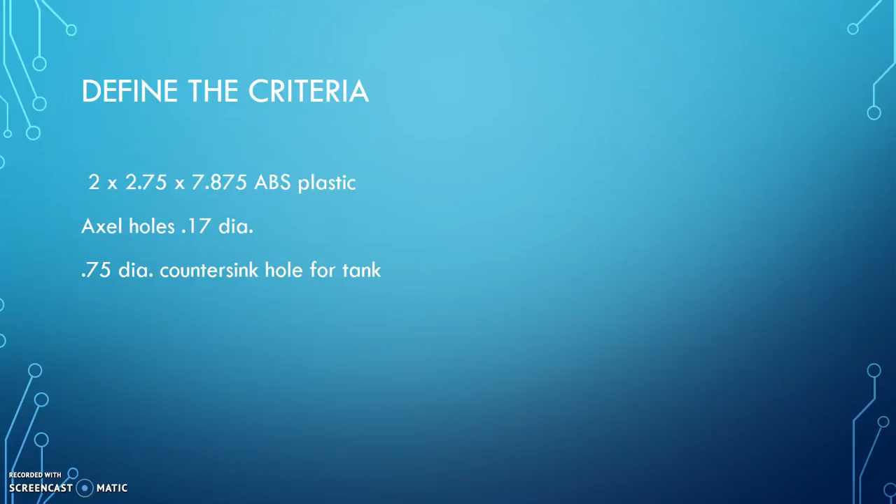The criteria given was to be within the dimensions of a 2 by 2.75 by 7.875 ABS plastic. Axle holes needed to be 0.17 inch diameters, and a 0.75 inch diameter countersink hole for the tank needed to be in the vehicle as well. The body was the only part that was custom. Everything else was provided and given to us: 2 front small wheels, 2 big back wheels, 1 CO2 tank, 2 axles, and 2 eye hooks.

Mainly the parts are given to us to measure and make sure that they would be snug and aligned within our final design. As soon as the project was listed, the first thing that came to my mind was Formula 1, so I decided to take inspiration from that research and what I could find. I knew I needed to make a car that could increase laminar flow and decrease turbulent flow.

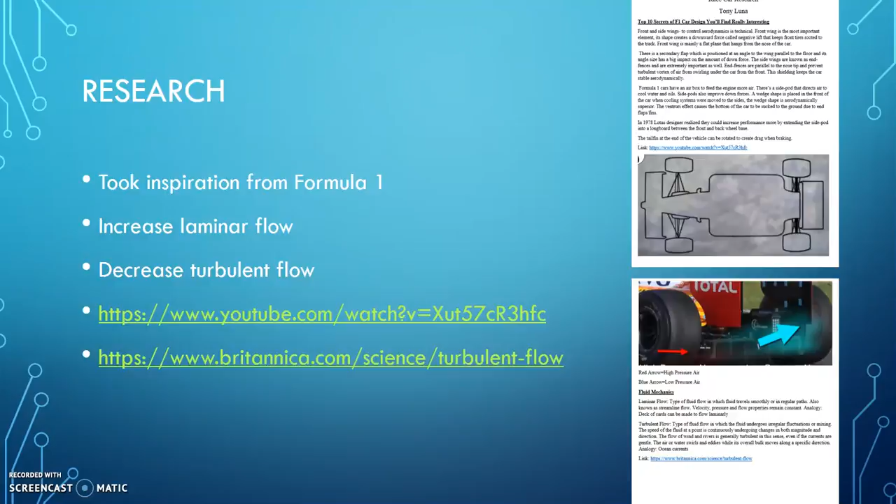In 1978, Lotus designers realized that they could increase performance more by extending the side pod into a long board between the front and the back wheel. I specifically looked into Formula 1 cars to find the best design ideas, and this is the most modern body style of cars used today, and it ended up being the best.

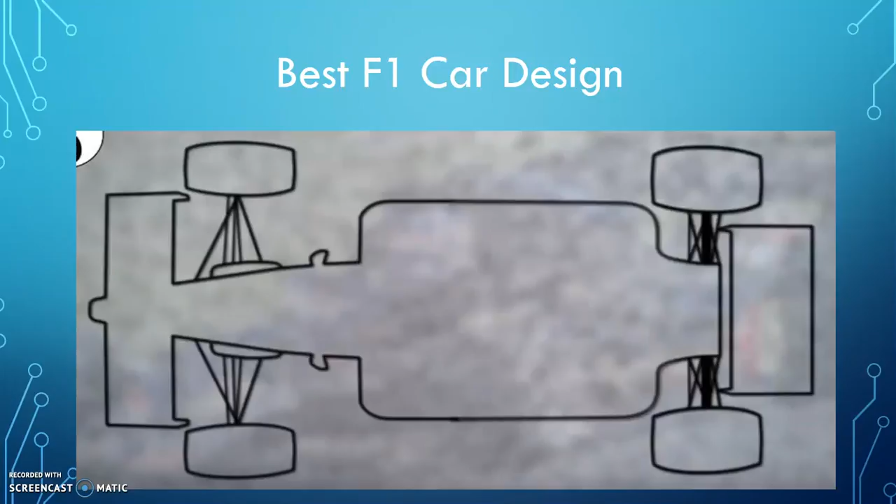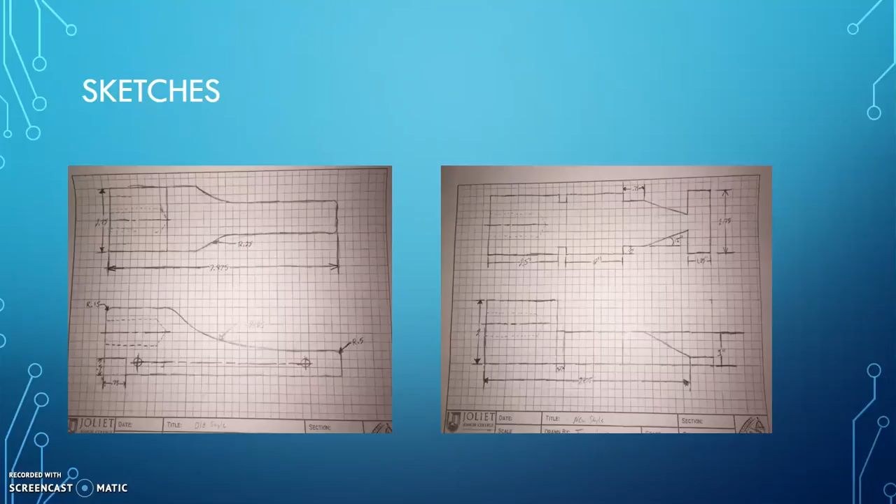The one on the left is my sketch of an old style body. The one on the right is my sketch of a newer style body. Eventually I went with the newer style because it was significantly superior, from the research that I found, to be faster. At first, this was my first choice of the body style that I went with. It was blocky and the tank was round.

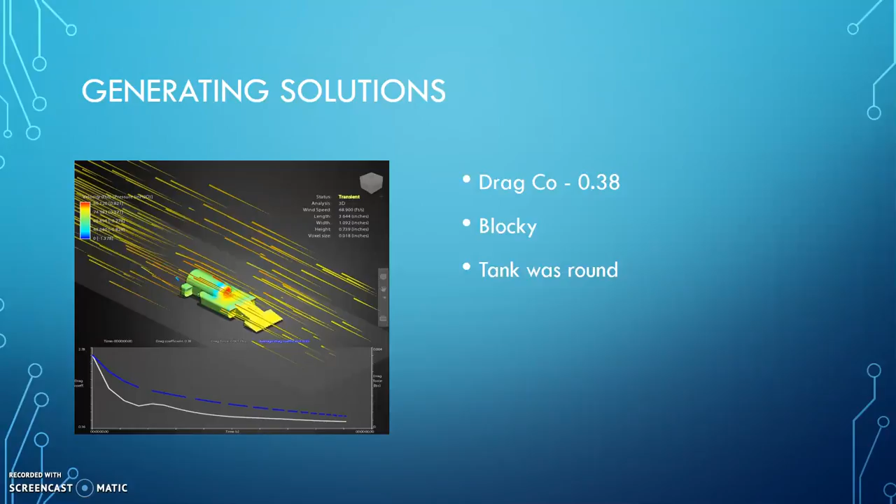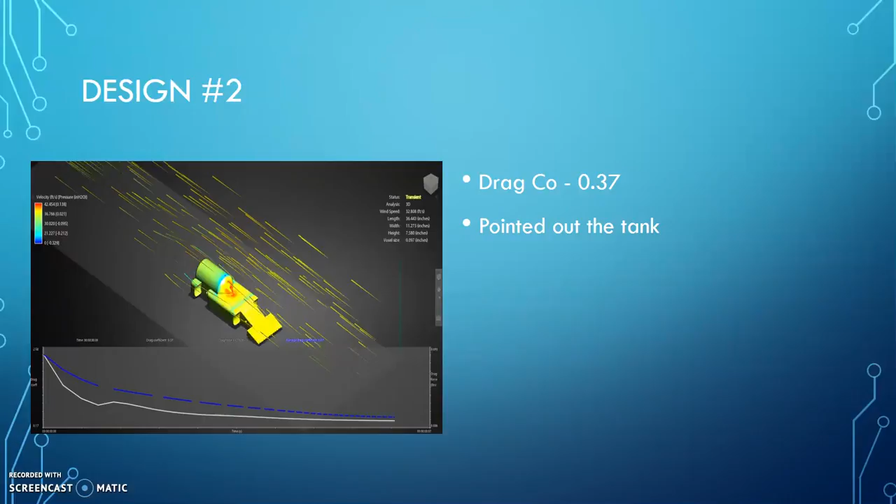But once I was introduced to the wind tunnel flow design and tested it out, I soon realized that I had some issues with my design. The coefficient was too high for me, and I saw some bright red in front of the round tank, and I knew I had to make some changes. In design number 2, I thought it would be a good idea to make the tank come to a point to reduce some wind, but there was still too much red in the front of it.

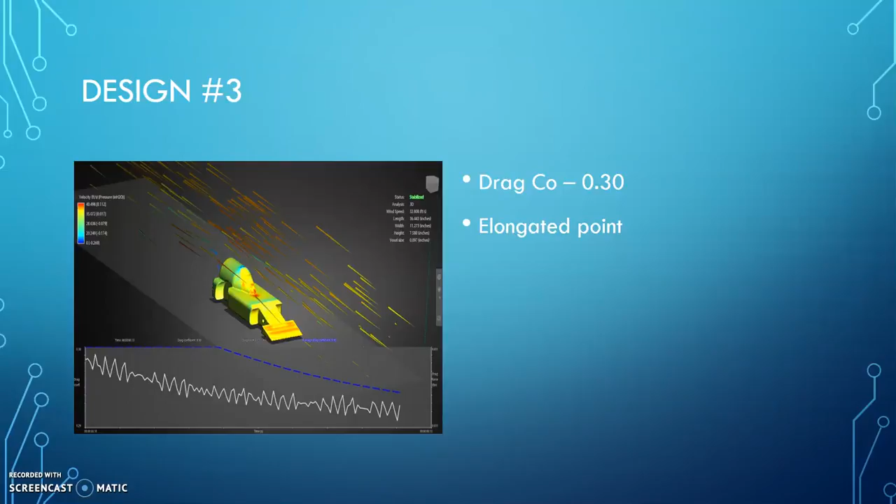So I went with design number 3, in which I rounded out the point, and it did create less red in the simulation. Then I noticed maybe I could extend the tank by making it longer, and I would therefore reduce drag. In doing so, I came up with design number 4, making the tank longer, sonic boom inspiration. If you've ever seen the Doppler effect, that's what I went with, and it really did not create much of a change in the drag coefficient. I needed some more blue and green because that showed signs of a laminar flow.

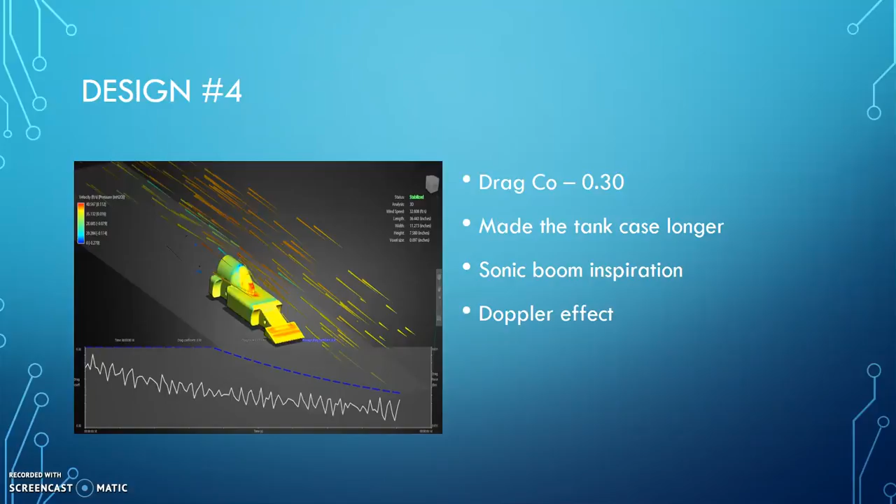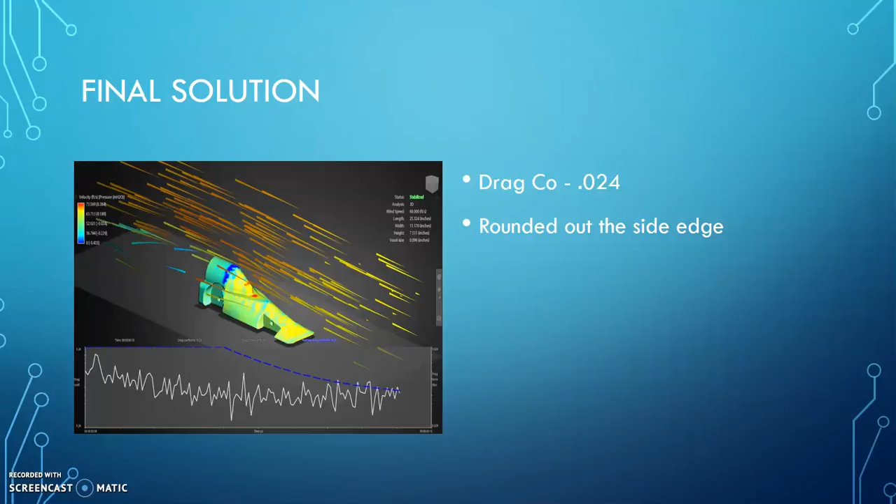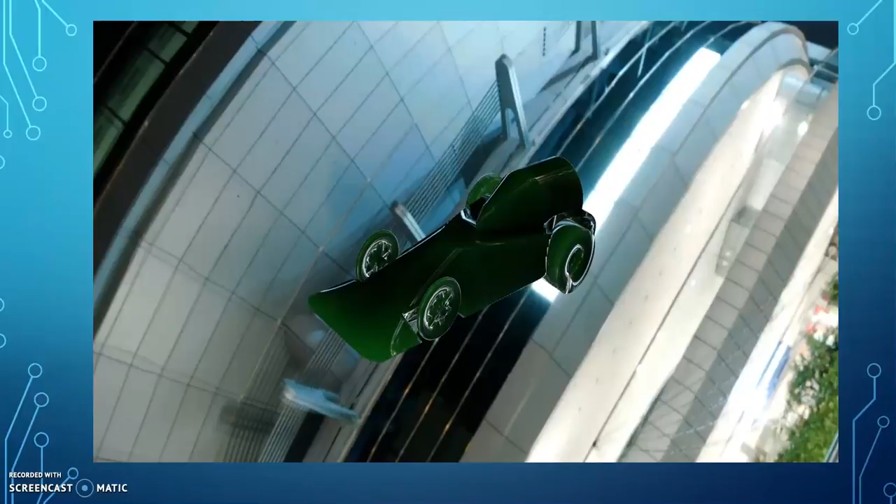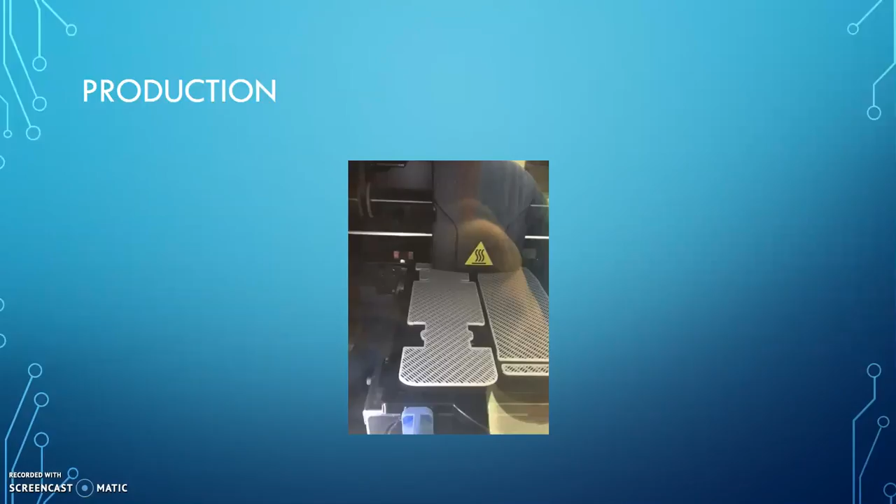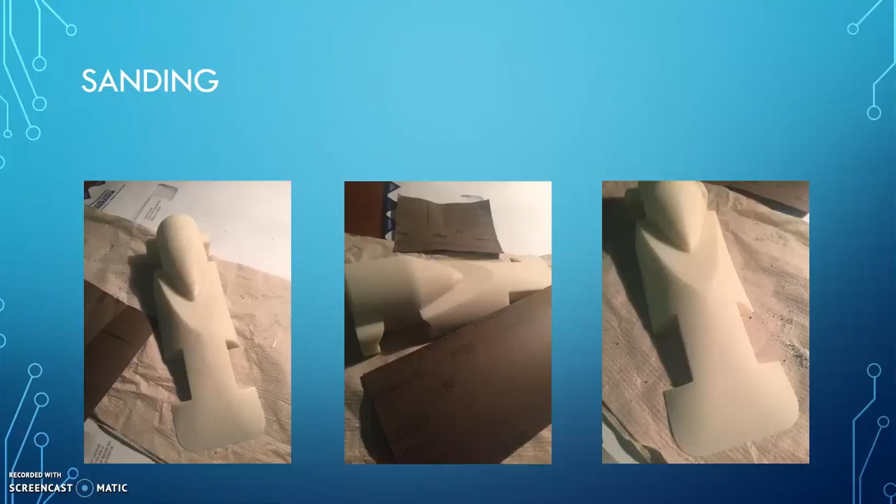Production: once it started, this is the first layer of the structural support for the 3D printing. Once my car was fully printed, I decided to sand it down with 80 and 180 grit paper to try to make the surface of it smoother. And when I found a texture that I was comfortable with, I decided to prime it and paint it. I added 3 coats of primer, 5 coats of paint, and 3 coats of clear coat.

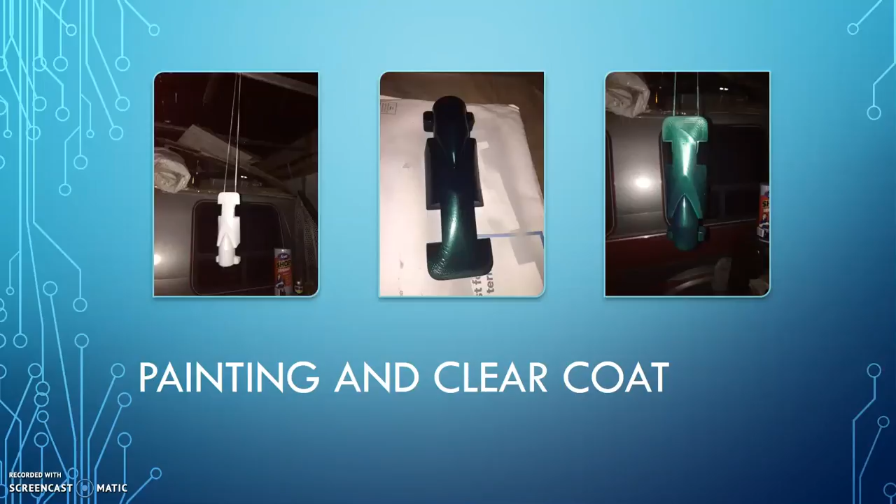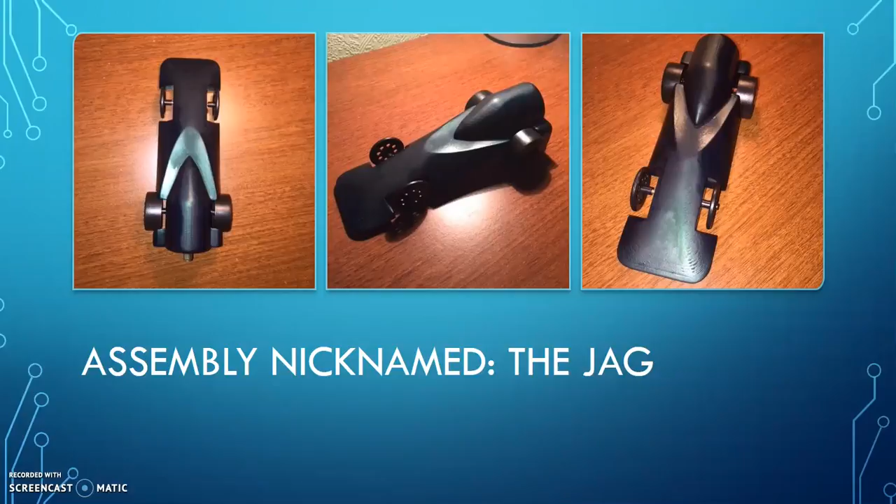Once the paint was dry, I assembled it, added the axles, put in the wheels, and made sure that the front of the bumper didn't grind down on the floor. Made sure it moved smooth and light, and I was quite pleased with it. The total weight of the vehicle ended up being 255.4 grams, a little light against the other competitors, my classmates.

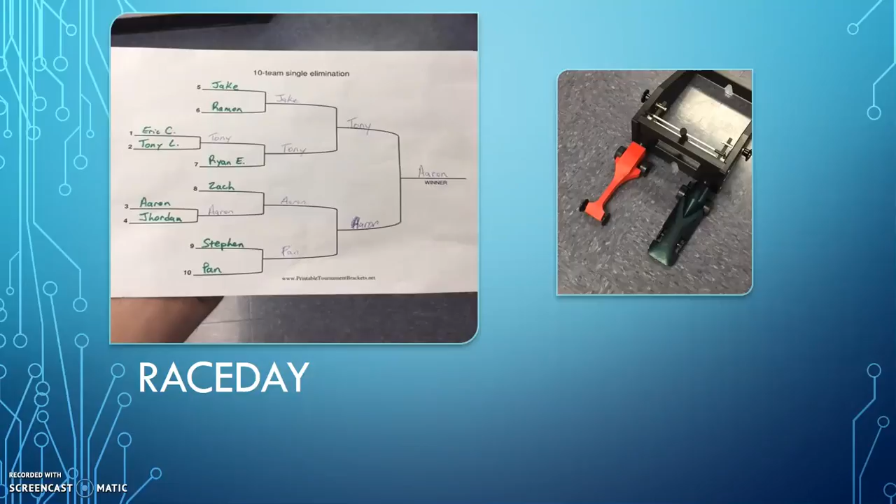My own design actually ended up being better than I thought. I tried to make sure that my vehicle was the fastest, most aerodynamic car, and it got me to the top 2 position. Versus Eric, Ryan, and Jake, my vehicle did win, slightly faster by 1 or 2 seconds, 3 seconds with Eric. We'll go to the videos in a little bit, and the photo on the right is the championship round between me and Aaron Schroba.

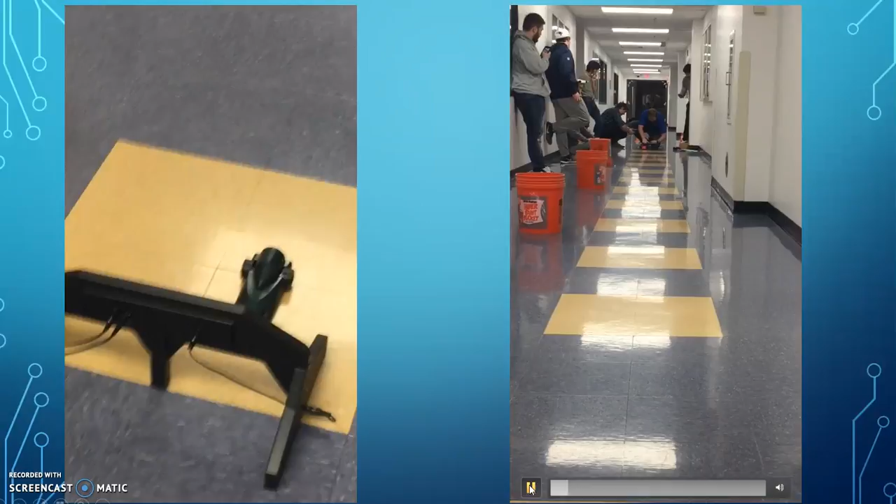Here are the videos. The video on the left would be me versus Ryan Elliott. Notice my car did swerve a lot. I figured out that was due to the weight distribution. There's much more weight in the back than there was in the front. The next video was between me and Jake Koza. Again, it did swerve, but it did win the race. Notice that my car would be 1 or 2 seconds in front of Jake's and Ryan's.

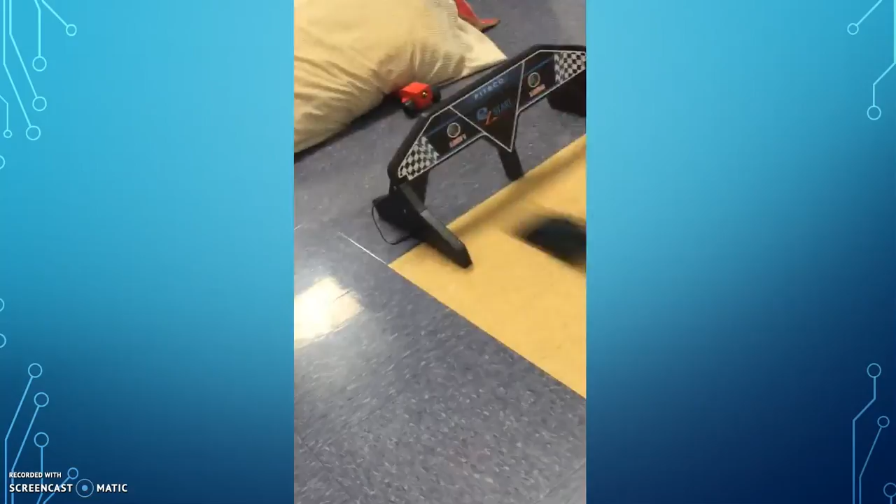Unfortunately, I don't have a video of me versus Eric Kreimeyer's car, which was the very first race. My phone wasn't ready to record the takeoff. But this is the final race between me and Aaron. Notice how much faster his car was than my car was against Eric and Jake's. Superiorly faster. And that finishes my presentation. Thank you.